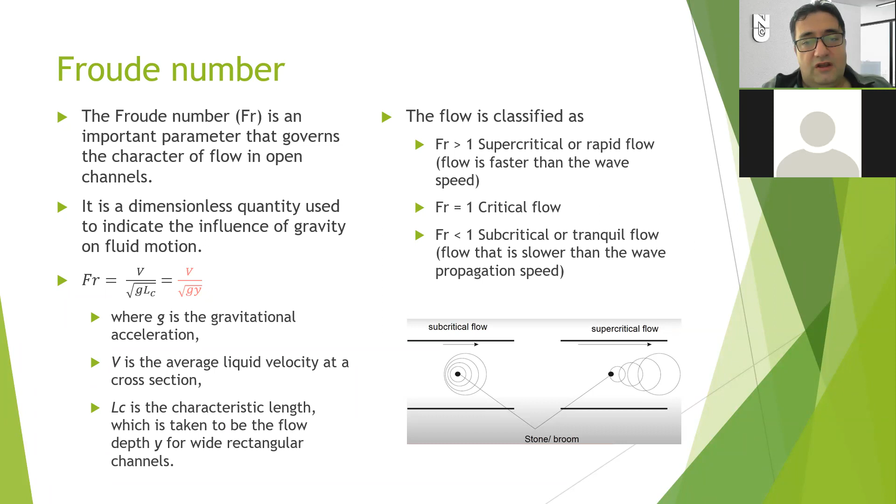Also, you can use the critical depth as a kind of comparison. If the height of your flow is higher than the critical depth, then it is a subcritical flow. And if the depth of flow is less than the critical depth, then you are going to have supercritical flow. And also, I'd like to remind you that there are always two possibilities with the same specific energy.

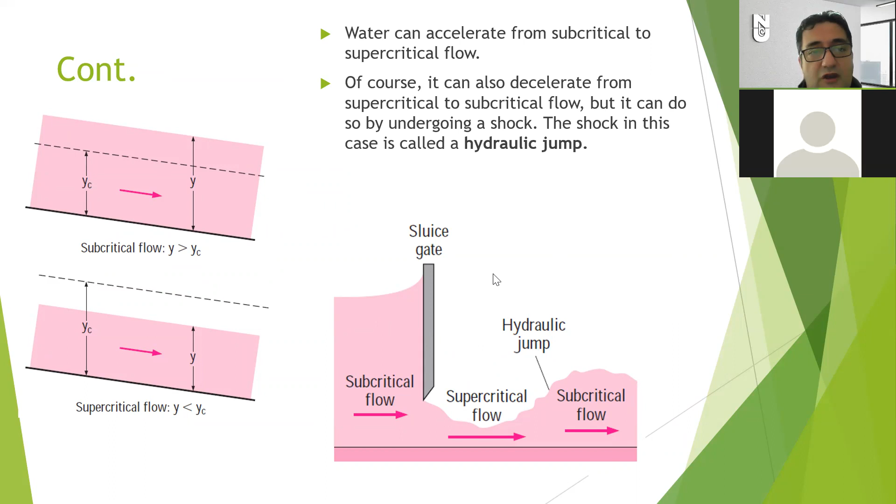You are going to learn today. So the flow could be subcritical or supercritical, and it is always a question what kind of flow you are going to have. Most probably you are going to be asked to identify the type of flow and the alternate depth for that specific energy. That's why today we will continue learning what specific energy is. Let's start the topic.

Sorry guys, I still have problems in my throat. That coronavirus still has an impact on me. It is not passing fast. Okay, so

the specific energy topic is important in open channel flow, guys. Listen to me carefully. Try to understand everything. And if you have a little hesitation in your mind about the topic, just ask me, please, because it is important that you learn and understand everything at this stage. Otherwise, you might have some difficulties. It's a bit complex topic because I think you have never seen such a thing before in energy calculations.

I've been teaching this course for more than 15 years, and my experience is that students have a little bit of difficulty to understand and grasp what's going on here. So let's be careful and listen carefully, okay? It's an interesting topic. Okay, let's first write the energy equation like we did in pipe flow.

As you remember, in pipe flow the energy equation turned into the Bernoulli equation. If we express everything in heads, in meters, the total energy is equal to elevation, the potential energy, plus hydrostatic energy, pressure over rho g, and the kinetic energy, the velocity head, velocity squared over 2g. This is the total energy equation.

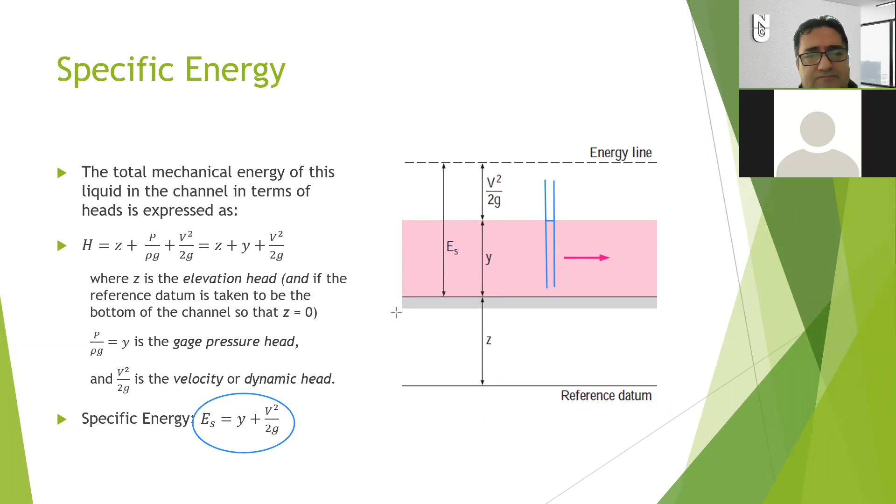Any question? No? No. Okay, this looks simple. Let's make it a little bit complex. Okay. And

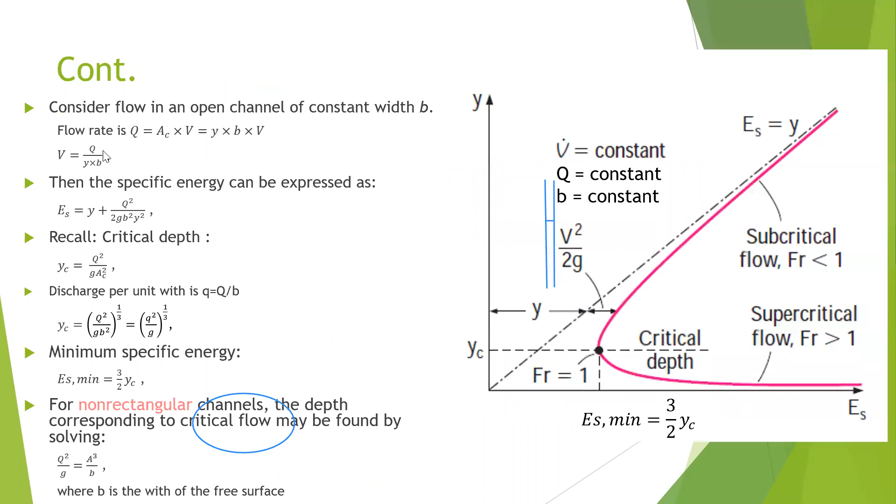if you calculate velocity, the velocity is equal to flow rate over area. Area means depth times channel width, and channel width is always B, guys. Okay, don't get confused. In open channel flow, if you see B values given, B is always channel width. Okay, B is always referring to channel width.

For open channel flow, if it is rectangular, B means the surface width, because it's equal to the channel width. So the velocity can be calculated in that way. And if you replace the velocity value in the velocity squared over 2g part, then you are going to get this value. Okay. And you may remember from the earlier section how to calculate the critical depth. The critical depth equation is given on the screen.

Just follow my cursor. I am going to do some annotation. Okay, this is the critical depth. And there's one more thing I am going to introduce right now. It is the small q value. Okay, the small q value. In order to make the calculations easy, some hydraulic engineers prefer to remove the B value, I mean the channel width value, because width is constant everywhere in that channel.

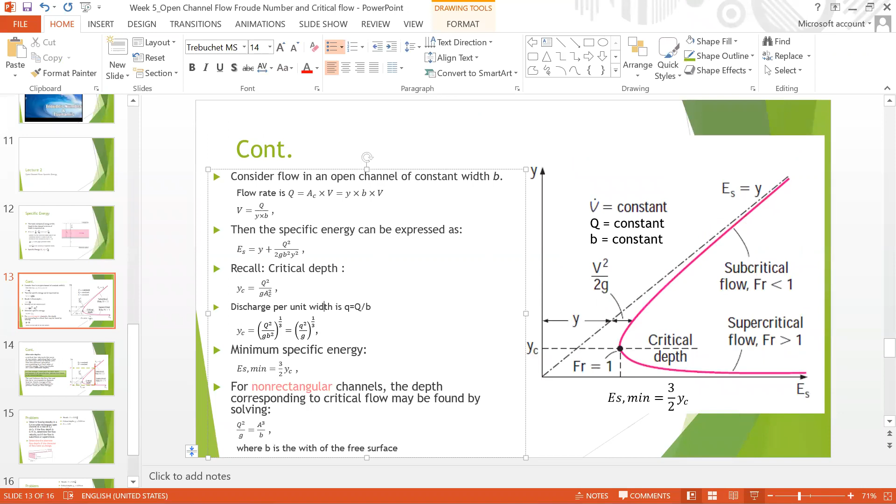So this is important. I am not making a mistake. In open channel flow, in most of the problems, if you look at other books and other sources, you will see that the flow rate is given in that way, but it is not actually the flow rate. It is actually the flow rate per unit width. Okay, so discharge per unit width is small q.

And you can rewrite the critical depth by making a proper replacement. Then you get this equation. Okay, this is another equation which is exactly used for calculation of y critical. So it can be used instead of this one if you like. And I want to take your attention to the graph on the right side.

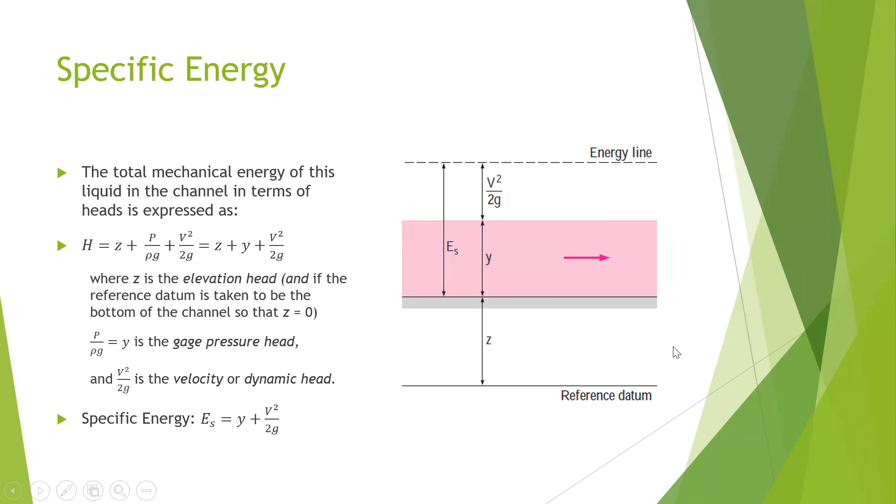You may remember that in the earlier part, I said the specific energy is equal to y plus velocity squared over 2g. And let's draw a graph of specific energy against y value. So you are going to write y values for different specific energies. And if you draw such a graph, you are going to get a graph like this. Okay, and this dashed line is exactly 45 degrees, and it goes in that way.

So the specific energy values, let's start with a smaller y value. When you keep increasing the y value, you will see that the specific energy will decrease. Okay, increasing y value means that specific energy will decrease. You are going to lose some velocity.

If you increase the height of the water, then you are going to lose some energy from the velocity, and there will be a balance, and then specific energy is going to go less. And after a certain point, if you keep increasing the y value, you will see that the specific energy will also increase. This is quite a usual graphic you can always experience in open channel flow.

In this graph, this part represents the y value, and this part represents the velocity head. In total, y plus velocity head, meaning hydrostatic pressure head plus velocity head, is the specific energy. And specific energy makes this kind of graph. And this point is called the critical depth point.

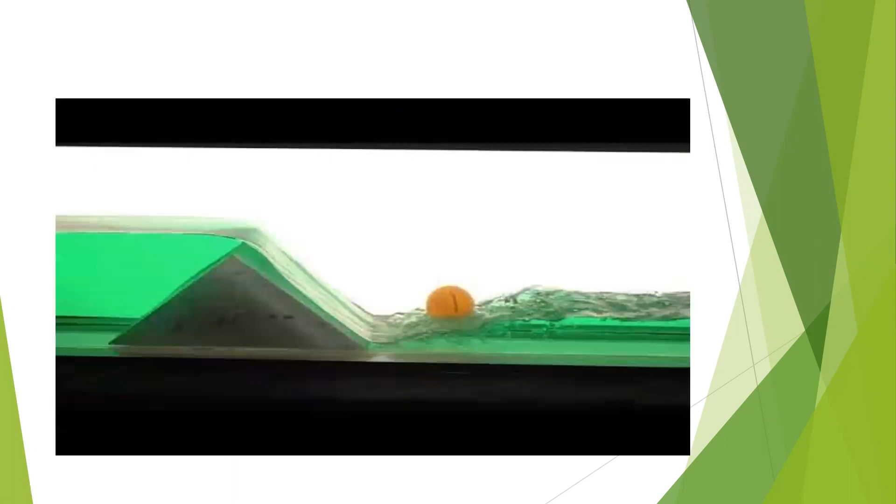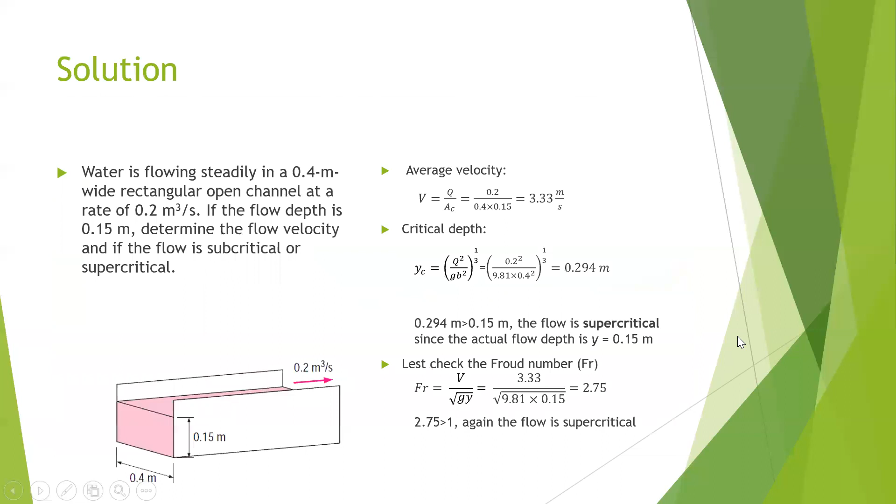Okay, I'm going to show you again, and take it a little bit. So at this stage we are talking about this part, and flow is supercritical, and after experiencing a hydraulic jump, the flow will turn into subcritical flow. If this water flow is going to experience a change in the state of its flow, I want you to find the alternating depth of this flow. Okay, it's actually very easy.

It means that the depth should be higher than critical depth for the same specific energy value, and that's why we need to know what is the specific energy of the system. Specific energy is equal to y plus this, and the depth is given, 0.15, plus this. If you calculate specific energy using this equation, you will get around 0.72 meters, approximately 72 centimeters.

And again, you are going to solve the same equation by using this specific energy, but this time we don't know what is y. In this equation you are going to write what is Q. We know the flow rate and the other values like the width, but we don't know the depth of the water. And then you are going to get a kind of cubic equation.

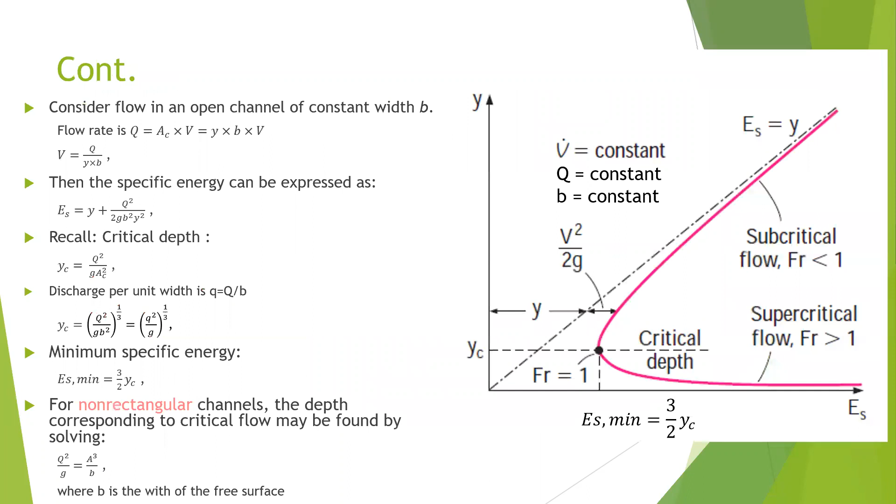Okay, so my question is to learn what's specific energy in open channel flow. And this graph is important. I think you are now able to read what this graph is indicating, okay? And what is minimum specific energy, what is this critical point. I mean, if I ask you to draw such a kind of graph, a specific energy graph, I think you will be able to draw it, okay? So don't forget that this is going to be a kind of 45 degree, okay?

So it means that this dashed line is specific energy equal to y, and this value indicates the critical depth. Over this value any depth is in subcritical flow, lower than this any depth is supercritical flow. And also this graph is indicating that for any specific energy given, there are 2 alternative solutions. One is in supercritical flow, the other one is in subcritical flow.

If you understood everything as I told you and as I summarized, I think you got the topic and you can solve any problem as it is given. And don't worry, I'm going to solve a couple more problems on Tuesday, and then I am going to close the session, and then you will be ready for the midterm. That's all.

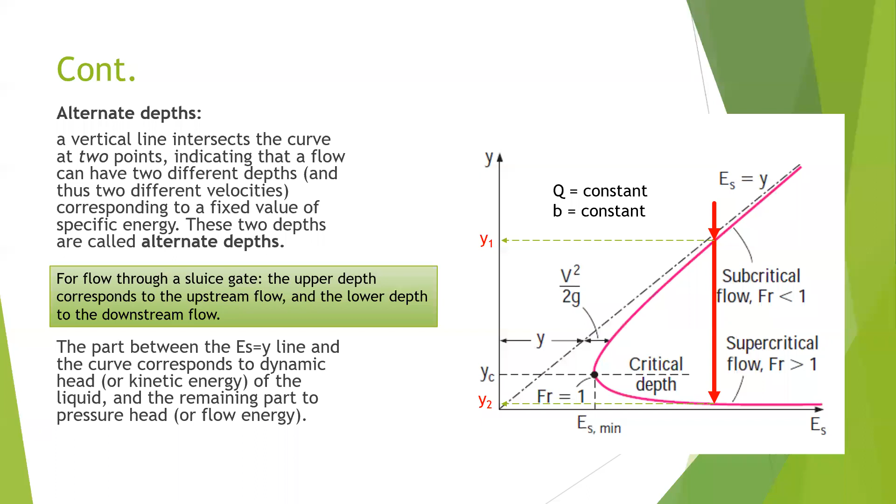No, it's Adana. Adana, in the first lecture I made a kind of typo and I corrected it. And this is correct: if Froude number is larger than 1, it's supercritical. Please update your notes. Okay, thank you. There was a typo here. Actually, after the lecture, I listened to my talk, the recordings, and I realized that I was saying the correct thing.